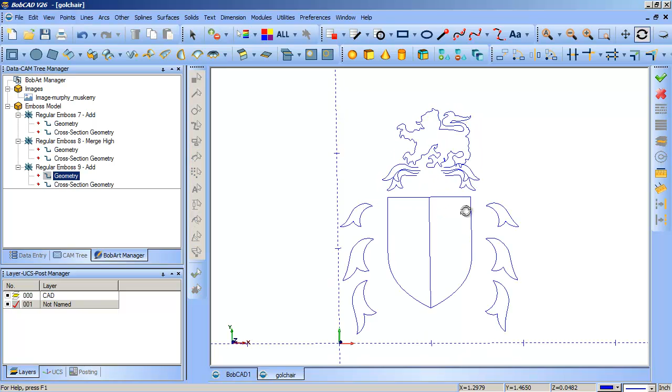But short of doing that, the other thing, and the way you get really good raised relief STLs out of them, like you find on those paid-for sites and stuff, is you actually draw geometry, and then do regular embosses from that instead of just an emboss from an image, because an emboss from an image is one single depth over the whole thing by color depths.

And once you have geometry, you can apply many different things to it. So what that looks like is, I'll just show you. I just traced a few things—I traced around the line, and then some of these leaves and things and the shield. So what that looks like is this. I don't know whether you need me to show you tracing or not, but it's basically just getting the general shape of the thing. Now I'll show you what I did—I preset up three things to show you already.

Let's get the model—I've got it blanked, so right now it's just flat. Let's blank it again, and I'll show you how I picked that. So I made this an emboss from regular. I'm going to select the geometry, and let's get that top one, this top one, and then all of these little leaves.

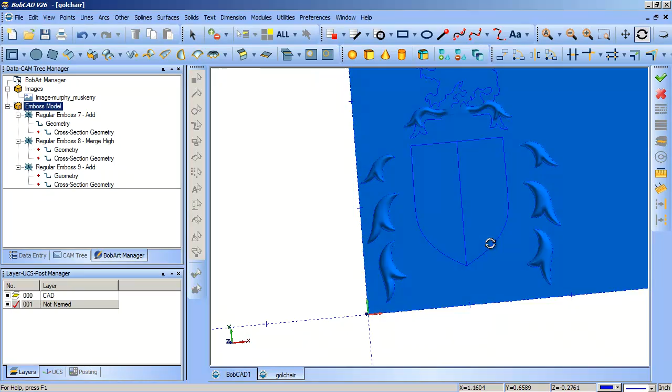And we'll select that one. So what that does now is, let's unblank it and regenerate. I get little nice raised puffs, and you can really raise them high and control the depths. That's how you're going to get so many different things at different heights to really give it that 3D look.

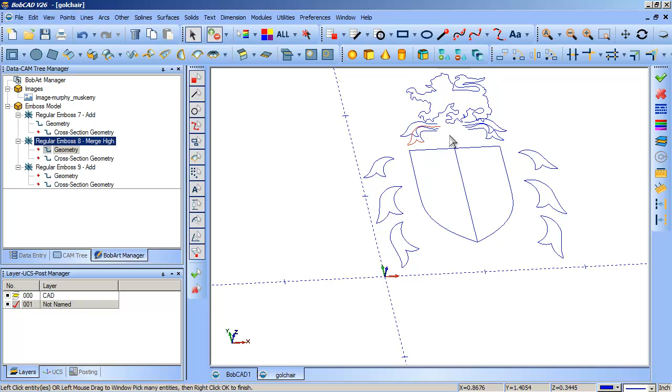So I'll go on and continue. Let's select this one—I think I made a second one, because if you select these two different leaves within the same emboss, then they totally cut into each other. Okay, so I select those two now. And then I think this emboss I told it is a merge high—that way it doesn't cut into the other one. They more or less bleed together.

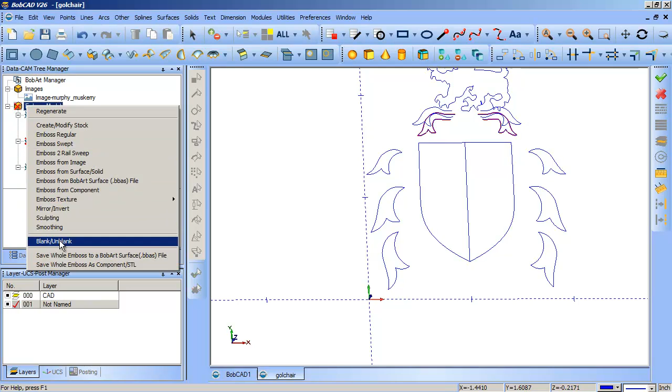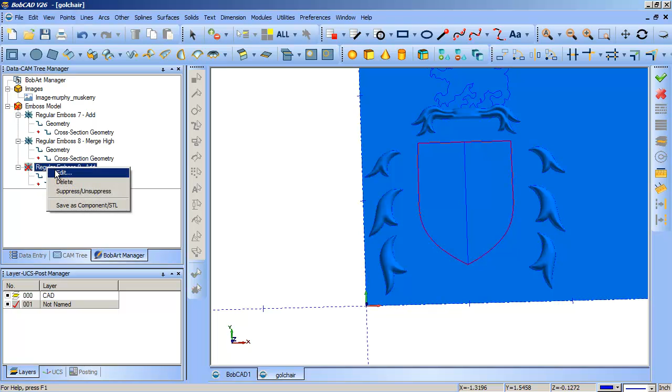And then so it starts forming the intertwining of that. I made one more for the shield here, which is just a straight line—a straight line at an angle, so it's like creating a bevel, a beveled edge. And so I beveled the shield up. So now what that looks like is...

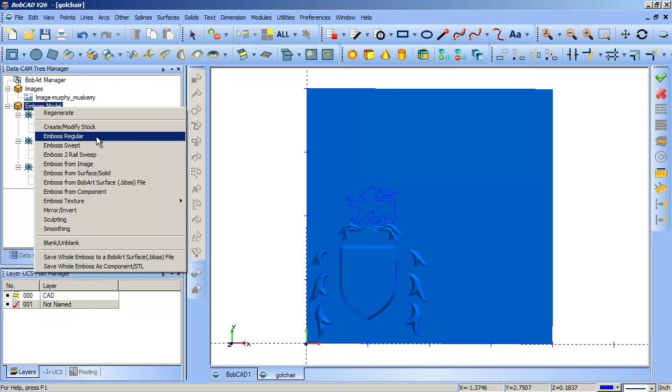At some point you can go and do the image emboss on top of that. So if I start right now, let's just do a quick image emboss. Here, let's go like this. Let's just make it 0.4, and I'm going to do a subtract because I like the way the lion looks with a subtract there. Then it starts to really come through and bang out.

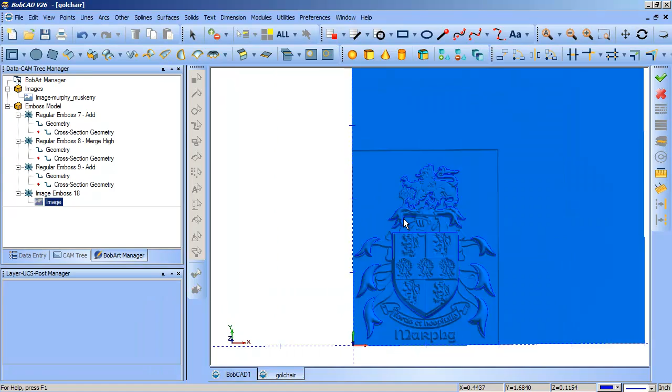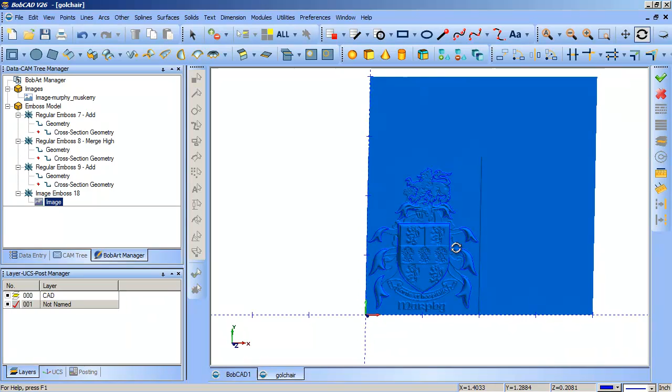But now you can see where all this lower stuff that I didn't do any geometry with yet is actually taking away from it, like the helmet area—that actually cut into the thing I already did. So what I'll need to do is trace that helmet and raise it up like I did with the leaves, and then the image will just plant the detail on it, like the mask area and the little slots around the top.

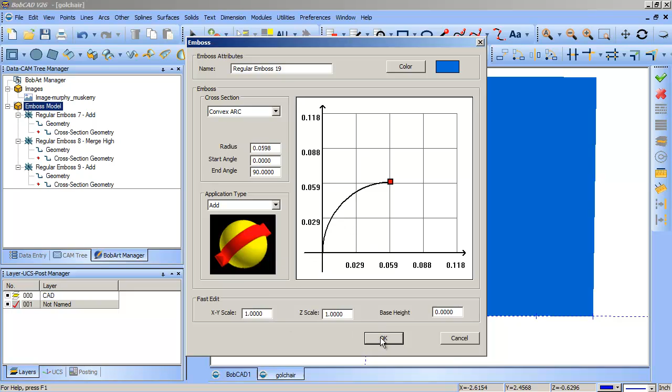And so let's delete that. Regenerate, let's see. Let's put another emboss regular. Let's bring that down to something like that. We're gonna make it an add, and I'm going to actually make a nice puff out of the lion there. So yeah, that doesn't look like anything great by itself.

However, if I do add the image on top of that after, then an image subtract is what I'm gonna do.

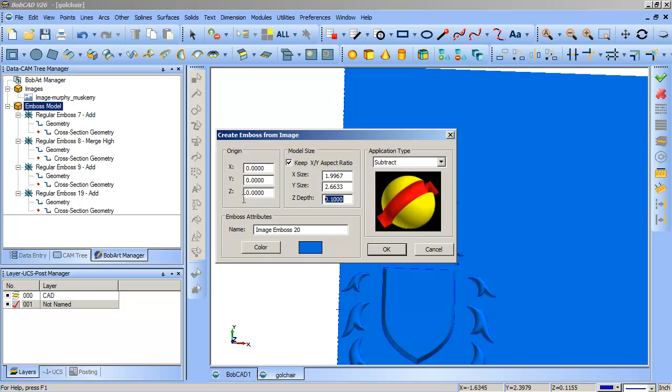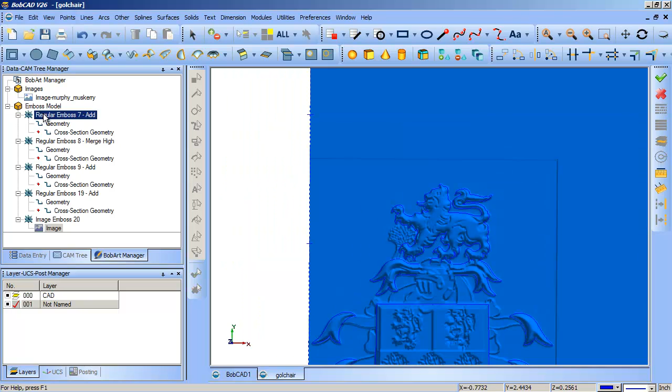Then you can see how it really starts to become a banging model. So the claws are on that leaf. Maybe I would edit my spline there, but leaving that leaf down under there throws it behind the lion, with the lion on top of it.

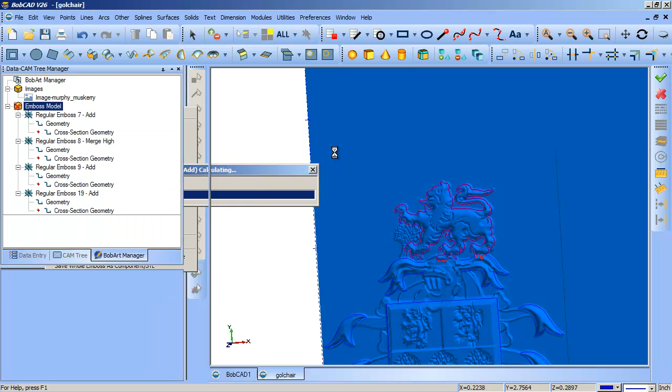And of course, blanking all the geometry and stuff, I can't blank on this. Okay, darn it. But you see all these other lower ones aren't done. I'm just doing it for the sake of showing you how I would do this model now. I can't really show you the whole modeling process here, because it would just take too long.

Basically I'm just tracing. So what is that? What does the tracing look like? I guess I could show you that. So if I go to my top view, my image appears.

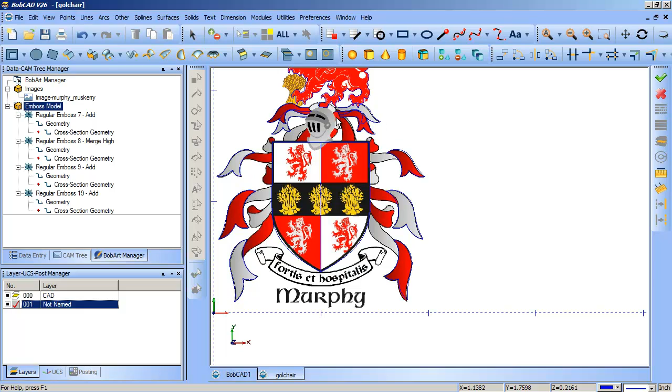Okay, so now I just trace these little leaves with the spline tool, so to speak. Let's say I want to trace around - I just want to do a blob around the helmet, right? So I'm gonna grab my tool over here, and let's just say I start here, and click, click, click.

Normally I would be able to hide the layer that has my other geometry on it, so I don't accidentally click on one of my other geometries, but I'm going to work around it right now. Since I'm just going to use this as a puff for the helmet, I don't have to go nuts and try to be totally perfect. I'm gonna just make a puff around that area, making sure it fits in with the existing topology of stuff here.

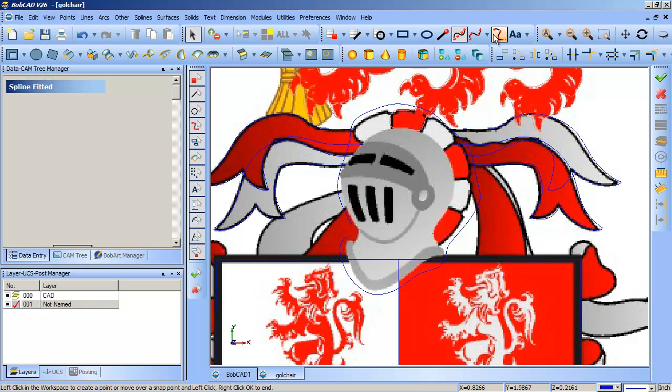I'm gonna let all this kind of detail come out from the image emboss. Now you can trace all these details and do image emboss and regular embosses, and you can get a super nice result. But you're talking about a lot of time, you know. So it just becomes up to you what you're doing that for.

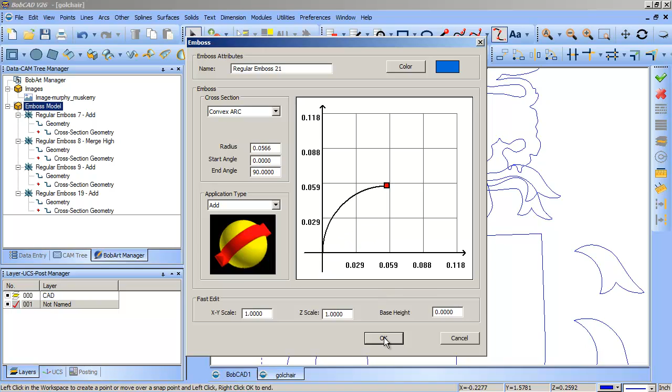So there's a helmet there. Go in, do another regular emboss. Get it to just a general size, whatever the size of all the other ones were. I'm not really being overly precise here.

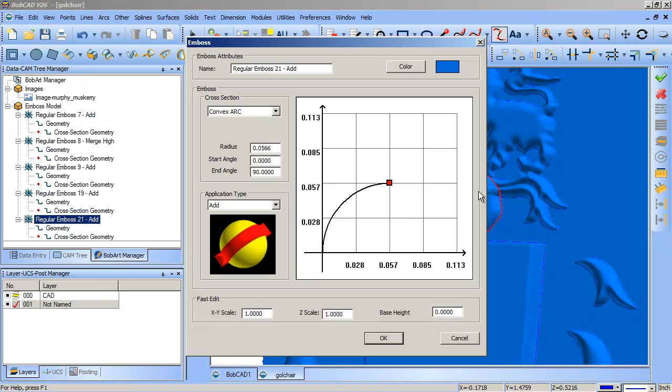Okay, and so now the helmet's popped up, and it looks like I'm going to want to make that a merge high so it doesn't chop into all my other geometry, right? I think that's the one I need.

There you go. So my other geometry goes through that, and then now if I do, yeah, I guess let's go up, and I think I should make that a little higher, right? Where's my height?

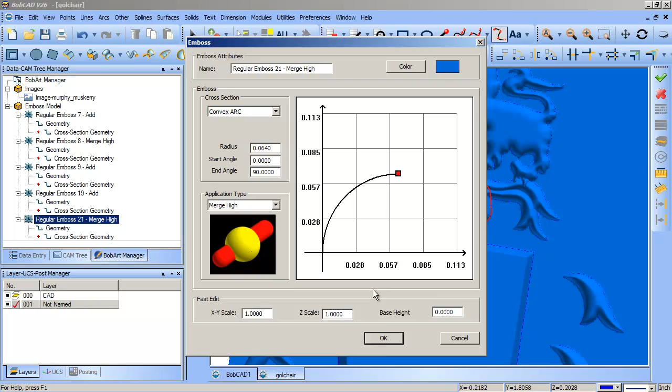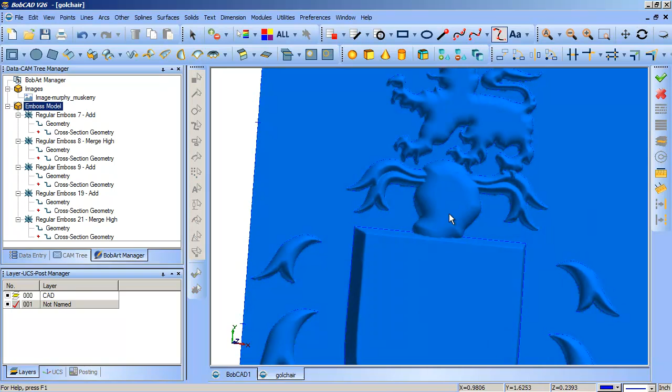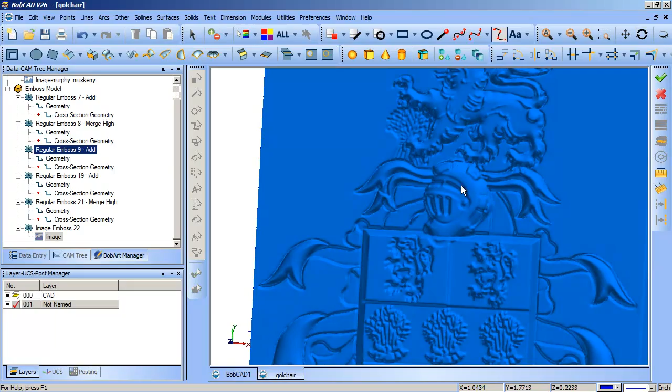There you go. So now I got my helmet above those leaf things, and then so now it would just change - I'm just showing you basically what I just talked about already. So now the helmet picks up the detail and it's raised with all the rest of the stuff again. So it's just taking the time to break out these other components that I hadn't done yet and just getting nice outlines.

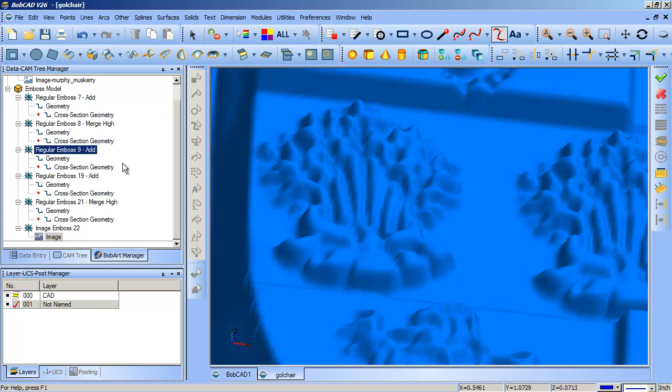The more 2D curves you can use, the better. And then just change the image, and the image is just going to throw the detail. Like right now, the only reason I'm getting these leaves is because of the image emboss. But really, I just want to be making my image emboss so minute, very small, and that adds the detail onto actually embossed geometry that I can totally control the height of.

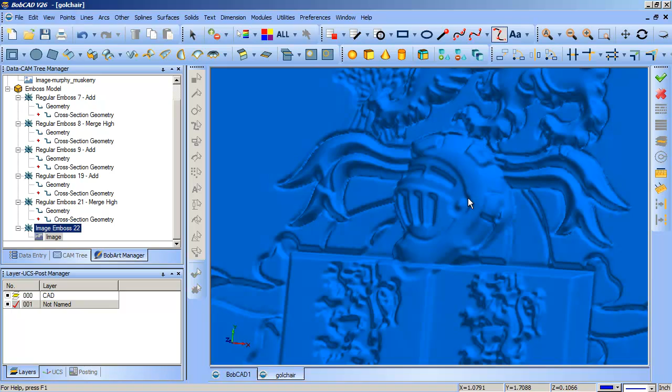You saw me control the height of how the head popped out in front of the rest of the stuff instead of it being all black and blended in, backwards behind and blended into everything. I can interactively control it. In theory, I could bring the helmet way out up to here - the helmet could be completely shooting out super high. Same thing with the lion - it could be further and back more because I have that geometry. With the image, it's all across the entire thing.

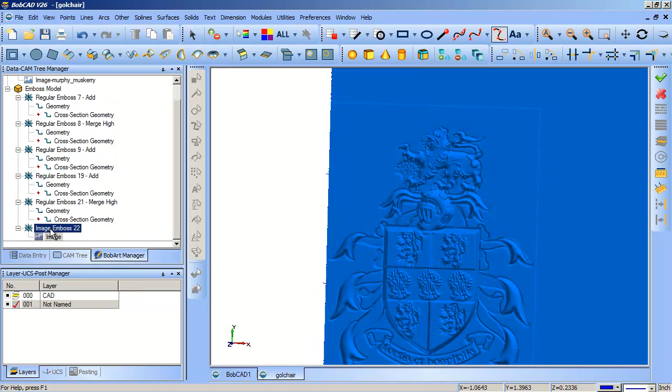That's it. If you're having a hard time with how to use the drawing tools, like the BobCAD's drawing tools, and how to do stuff like this, I guess I could do that a little bit here for anybody that doesn't really have that hard a time. Maybe go ahead and stop watching from here, because all I'm going to do is trace out this thing right now to make another one of these little leaves.

So first things first, let me drag my thing off of the screen for a second so I can switch and turn off the layer with the other geometry on it, and that'll allow me to not get stuff in the way. Okay, so I had traced these already. Let's go ahead and trace something like this, right? So, okay, let's, I'm gonna just go like this. All right.

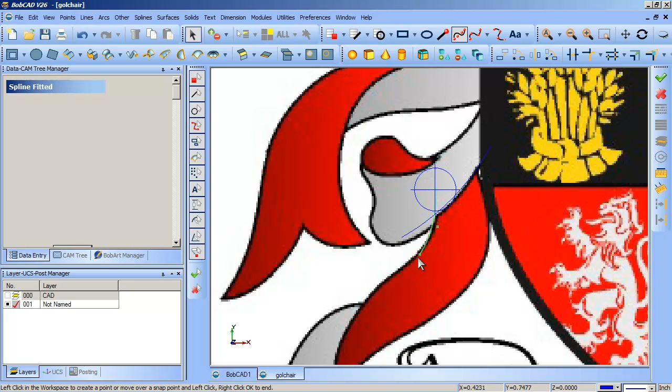Okay, notice I'm not going too nuts. I'm not being too overly worried about stuff. I'll show you a couple of the other tools here in a second. That's why. Okay, so there's that basic shape.

So now I'm going to grab my quick trim really quick, and I'm going to whack off all the ends that overlap each other. Now what that gives me are sharp points and splines in between. So now they have these other tools too, drag corner and deform. So I'm going to start off with the deform, and I can just go around and fine tune my crappy drawing I did, right?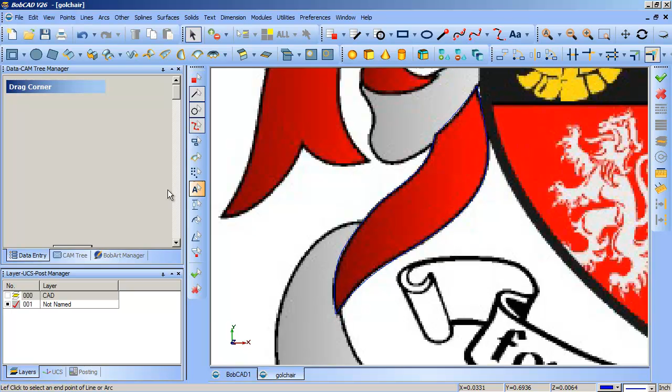And then there's also a drag corner, which, once you click there, actually keeps them both together, which was really nice. And then, you know, there's that shape, and so it's just a matter of going and doing this one and doing this one separately, or doing this all as one.

You'd want to do these separately, because since that's supposed to be a relief behind the other one, you're going to want to emboss here and then change the height of that one, or make it a convex emboss, and it'll actually dig in and cut. You see what I'm saying?

So you know, I got most of it drawn out. You could just draw the rest of these little things. I mean, these I drew in just a few minutes. I was going to do this yesterday, and then I got tied up. But yeah, I did these two up here. You'd want to draw these that come out of the head down here, and a couple of these. As long as it took me to do that, I'd probably work on this for about 30 minutes.

And then stuff like text, it's always going to be better to actually use text. So again, if you can find a font that matches that, then just retype that, place it about the size, and use that as an emboss. Same thing with down here. I can do this, but how crisp is it going to be?

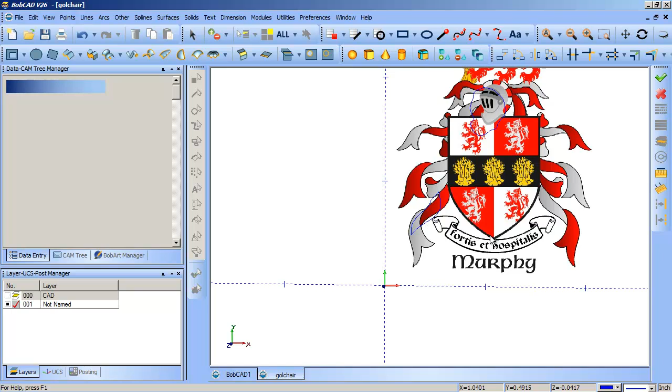Just outline this thing right here, and then emboss that ribbon as an extrude, and then you could draw a curve from right here and fit text to curve, and then use that text to emboss. Anyway, kind of long and drawn out, but that's kind of the gist of how I would do it.

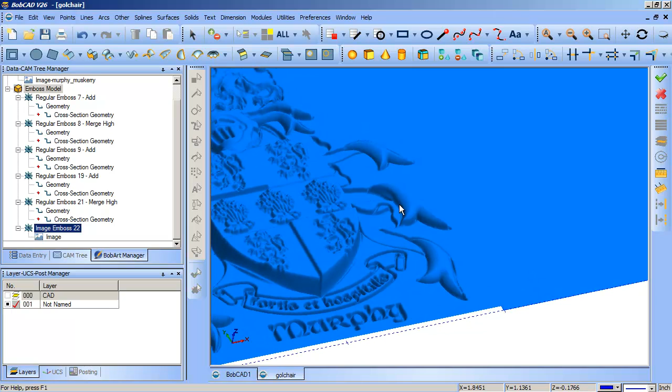And I didn't show you the whole thing, just kind of a start of it, but that shows you how if I had to do a really good job on this, I would draw all the geometry to be able to control everything, and then I would just use the image to give it that much more fine detail added on. Again, this one, the emboss of the image is still a little deep because I'm trying to just show the detail on there.

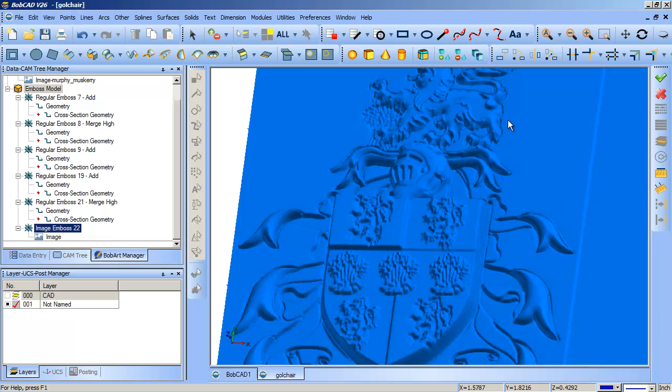But once I actually draw this geometry and I'm doing my actual extrudes, you could call them, with geometry, then I would just use the image to add detail onto this. So you saw me do this lion, and now the image is only really putting the little lines on it. That's the inner stuff. The actual emboss is coming from that outline that I drew around that.

Same thing with all these. You don't want the height actually coming from the image. You want to just use the image for detail. Get all your extrudes and height from actual geometry, and it comes out much cleaner, and you have way more control.

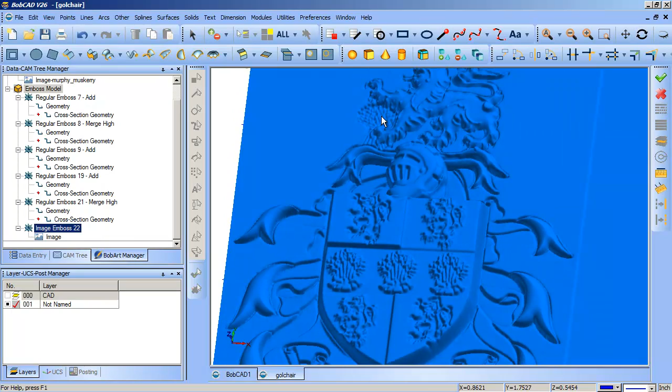And I think that's even what you were asking, like, if you see this, this is up and this is down, and how would you do it all on the same? I'm not sure if that's what you were asking, but yeah, that's how you do that here. This one's in and these are out. How do you make them all in, so to speak?

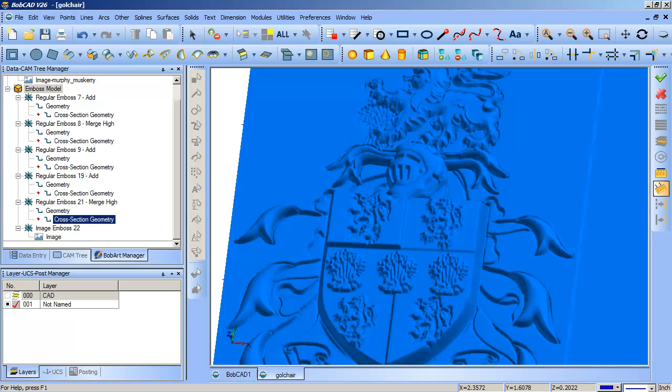Well, actually, if we go look at the image, you'd probably have to reverse the colors on this part of the bitmap to match, and then I would do an emboss image. I would make two different images. I would cut that image in half and just use the top half, and then I would reverse colors as needed, and I would use an image editing program to do that. Okay, more long-winded than I've been in a long time, but that's how I would do that image.